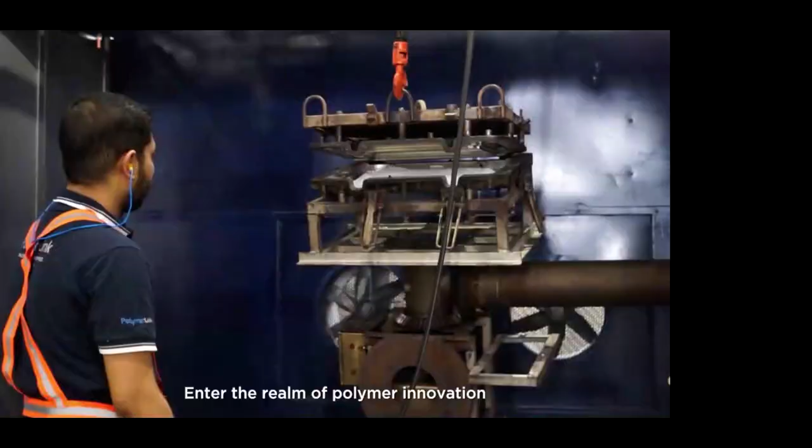We are now living in a future where every design is achievable and every color possible. Enter the realm of polymer innovation, where roto-molding has shaped the world's industries and where Polymer Link takes the lead. A prominent figure in Southeast Asia's roto-molding industry, Polymer Link specializes in polymer compounding and raw material supply.

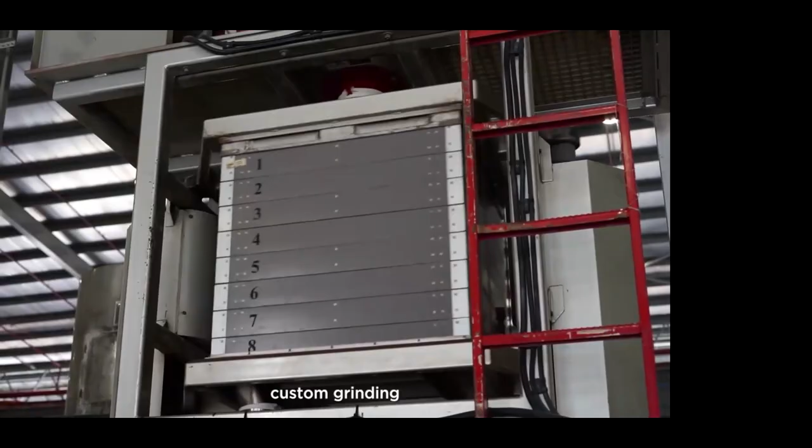Our expertise spans polymer compounding, custom grinding, and the meticulous crafting of color master batches. With dynamic state-of-the-art facilities positioned across Malaysia, India, and the Philippines, Polymer Link is poised to be the gateway to a dynamic ASEAN market. Our strategic presence across the region represents the seed of innovation, cultivating an environment where creativity and progress thrive. These are the spaces where ideas take form and where businesses come to life.

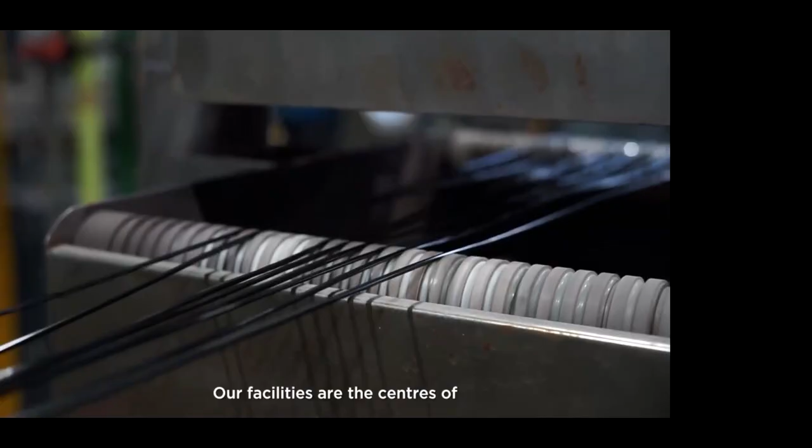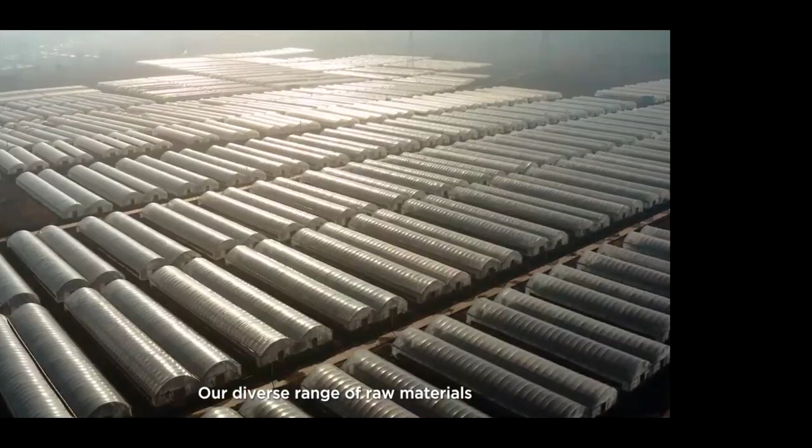Our facilities are the centers of technological advancement and breakthrough, where polymer solutions are developed, continuously reshaping industries and touching lives around the world. Our diverse range of raw materials is carefully designed to cater to the specific needs of various businesses. From specialty grade to engineering grade and culminating in standard grade materials, we've got every aspect covered to meet every demand imaginable in the world of polymer innovation.

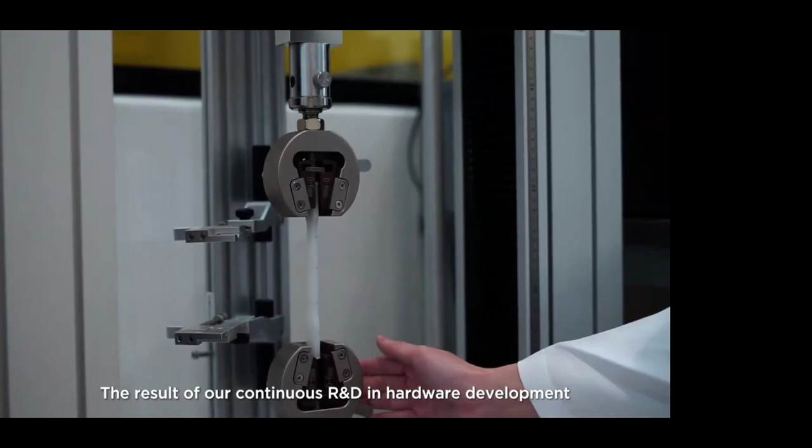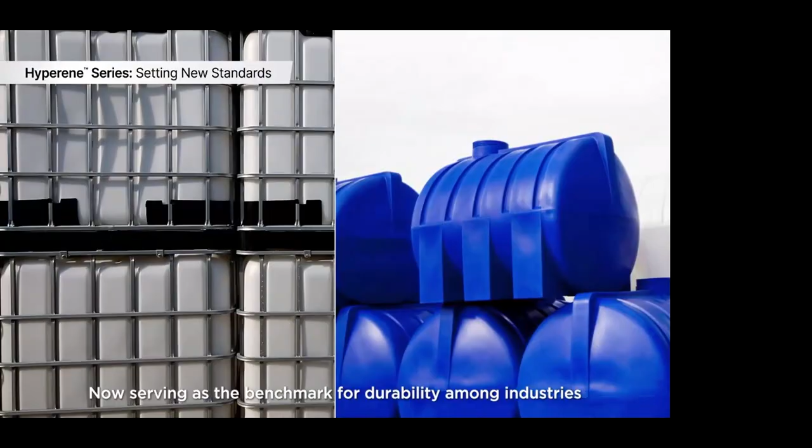The result of our continuous R&D in hardware development and material cultivation is the Hyperene series. More than just a polymer, Hyperene is a specialty-grade roto-molding material that raises the bar for toughness, now serving as the benchmark for durability among industries dealing with highly corrosive materials and intensive wear and tear.

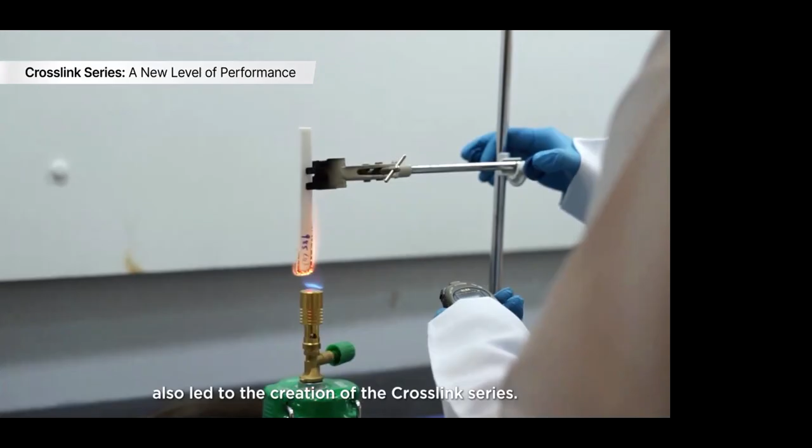Consequently, our advancements in material technology have also led to the creation of the Crosslink series, known for its low odor formation, minimized pockmarking tendency, and wide processing window.

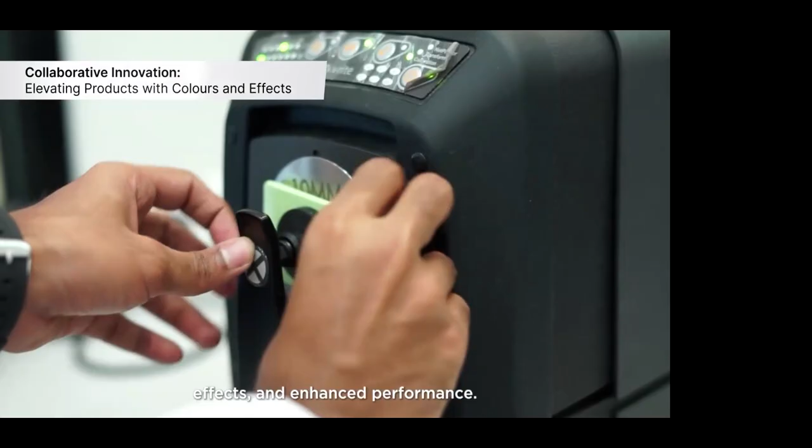At Polymer Link, we are ultimately collaborators working alongside clients and suppliers to create masterpieces of color, effects, and enhanced performance. We are the architects of polymer innovation, committed to excellence in research and development to maintain the highest quality standards. Our dedication to quality is validated by our certifications: ISO 9001, ANAB, JAS-ANZ, and BSI Kitemark product certifications.

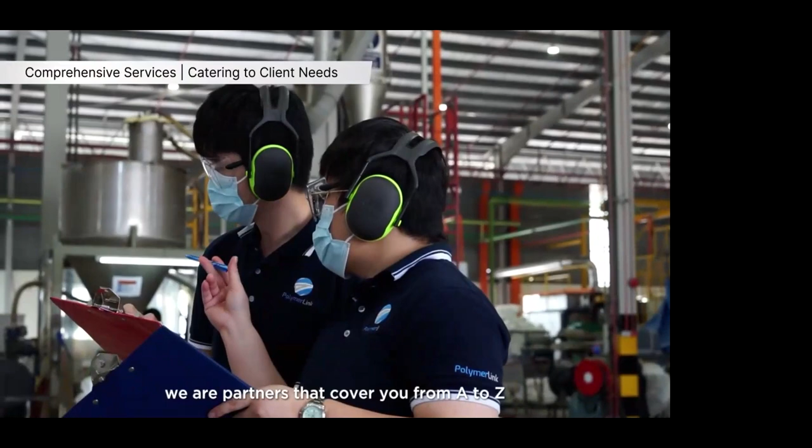Thus, Polymer Link is more than a supplier. We are partners that cover you from A to Z, from technical support and troubleshooting to seamless toll processing, optimizing every step of your journey in the world of polymers.

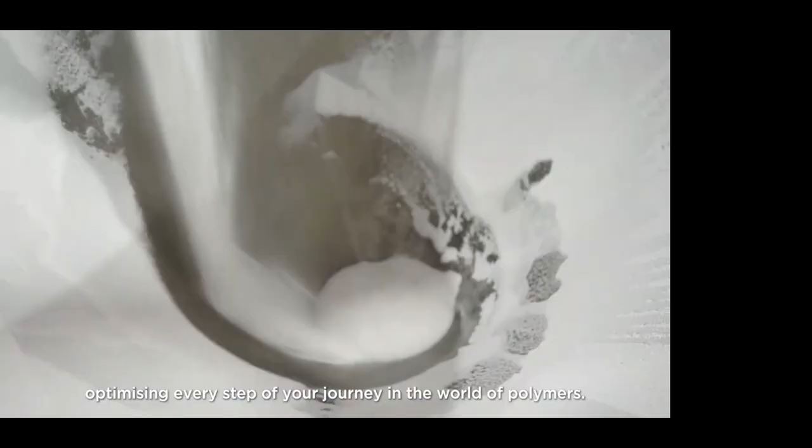All in all, we transform dreams into reality. Designs come alive, colors pop, and possibilities become tangible. We turn potential into reality. Polymer Link, igniting innovation, molding tomorrow.

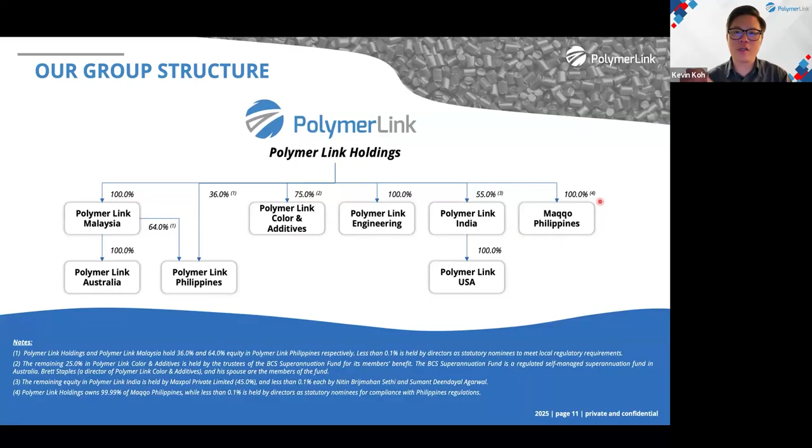The group owns 100% of all subsidiaries except for Polymer Link Colour and Additives, where we have a 25% minority shareholder, and Polymer Link India, where we also have a 45% local minority shareholder. In the Philippines, we also own 99.99% of Maqqo Philippines, with a nominal portion held to meet local regulatory requirements.

Before I move on to our business overview, I would like to frame the plastic landscape quickly so that rotational molding has some context here.

If you imagine all the major processes in the plastic industry, you will have injection molding, which dominates small parts at very high volumes but requires expensive steel tools. Blow molding is for hollow thin wall bottles at very extreme volumes, the likes of your jerry cans, your shampoo bottles at home. So those are all blow molding.

Then you have thermoforming, which is for food containers, a heated sheet shaped into shallow shells. And then we move on to our industry, which is rotational molding.

Rotational molding is basically slow baking of the powder inside a rotating mold. The whole process is stress-free, and the whole part is one piece with very uniform and thick walls.

Polymer Link is involved in manufacturing of plastic powder for both general and specialty applications, with a core focus on this rotational molding industry. Our capability spans formulation, compounding, and grinding. As I mentioned earlier, we also manufacture master batch, which is used in-house as well as externally.

For general applications, they are designed for day-to-day use. For our specialty applications, they are engineered to meet more stringent requirements such as UV resistance, impact strength, as well as environmental stress crack resistance.

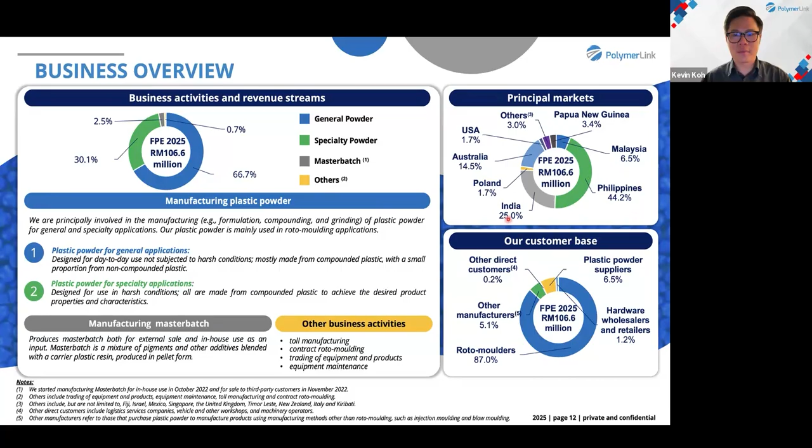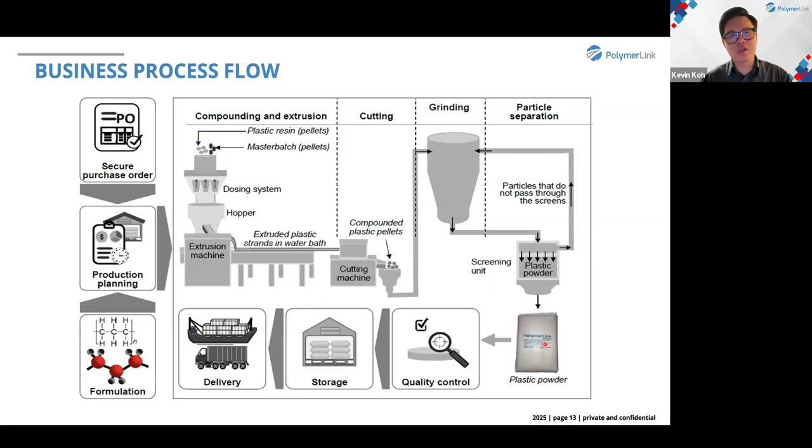Then stage two covers our niche expertise, which is size reduction. So the pellets go into a granulator and are ground into the final form, which is plastic powder. This is the form used in the rotational molding industry, and it's the only form that works well with this process.

Some of these are competition grade kayaks, so they require very high rigidity for their use. And then you have diesel fuel tanks, you have anti-piracy barriers. Anti-piracy barriers are used in the security industry.

They are utilized by shipping liners where it's fitted onto the ship. This prevents pirate attacks. A lot of these shipping liners actually go through straits where it's very prone to pirate attacks, like the Somali Straits and others.

For general applications, our powders support day-to-day product needs and industrial categories. This helps customers achieve cost-effective designs at scale.

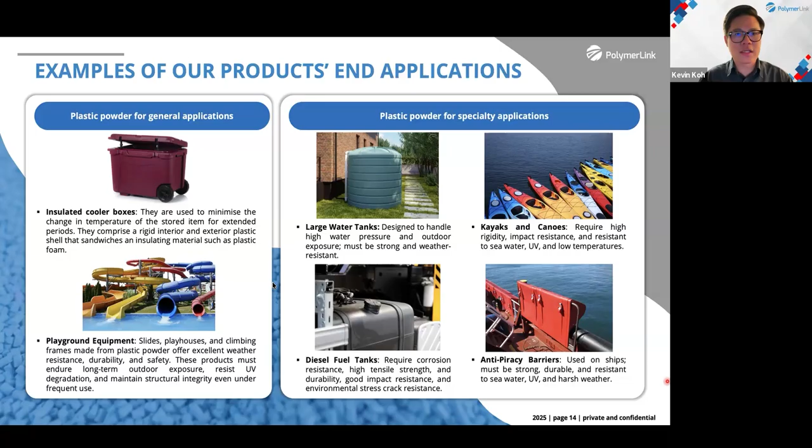Customers typically purchase our powder and then place it into this hollow mold. The hollow mold is then covered and transferred into the oven. Inside the oven, the mold rotates on two axes, so it's a biaxial rotation. As it rotates, the oven heats the mold.

Once it's cooled down, the part is removed as one seamless part. So if you have, let's say, a cover of a printer, it is removed as one seamless part and you can just fix it onto the printer.

So rotomolding offers many key advantages. The first one would be no high pressure required, so therefore more affordable molds. With injection molding, because of the pressure required in the process, the molds are actually very expensive. But for rotational molding, it's the opposite.

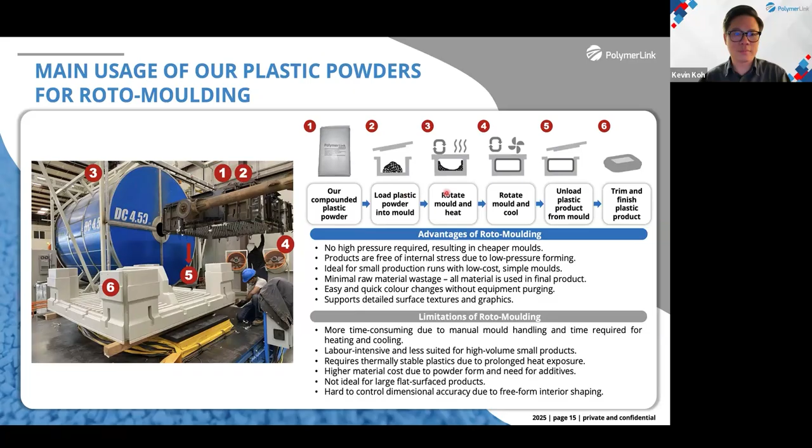So what I'm going to show you here, it's a video of our customer's process.

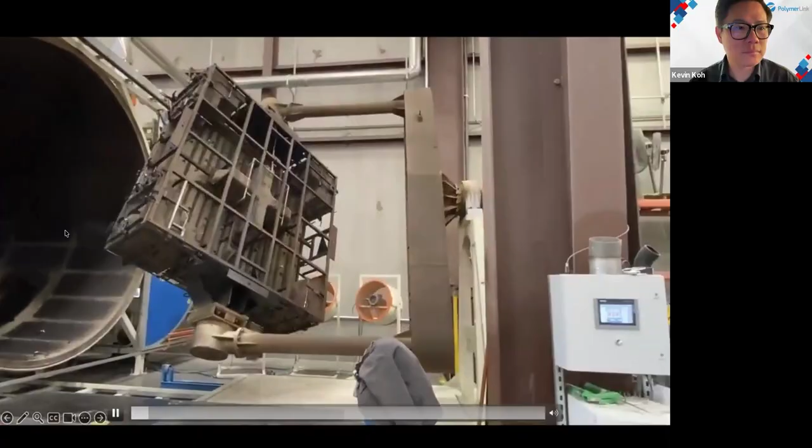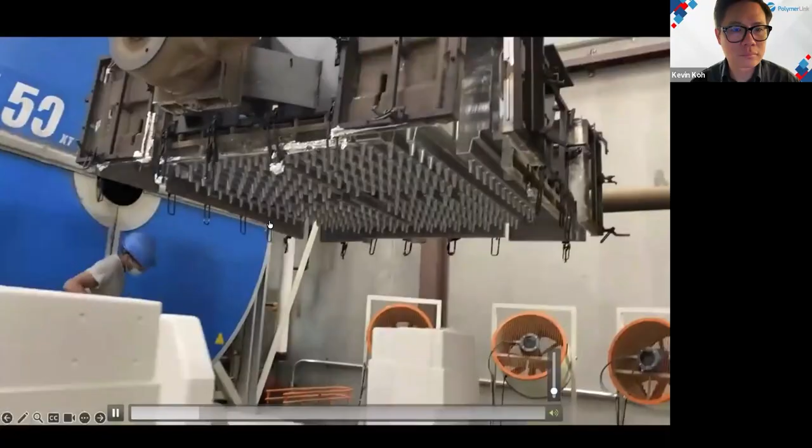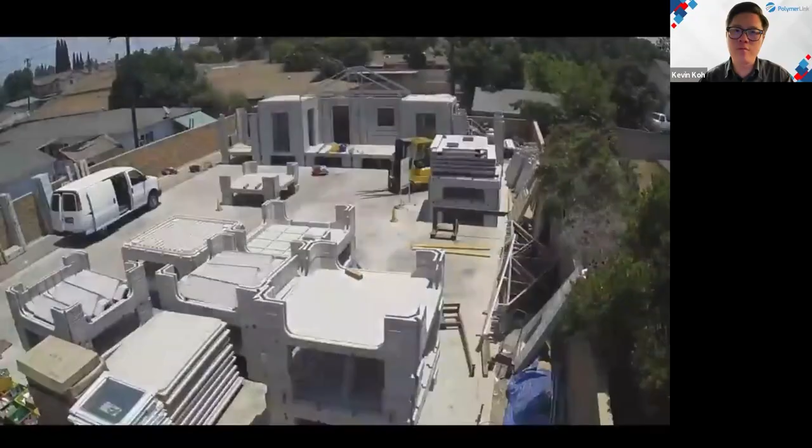So what you see here is a modular housing component. So they are actually placed together like Lego. And in this particular material, we have formulated it with flame retardancy as well as 30% post-consumer recycled material. So these are all your film waste, your single-use plastic waste, and that is compounded into the material that we have formulated for this particular customer.

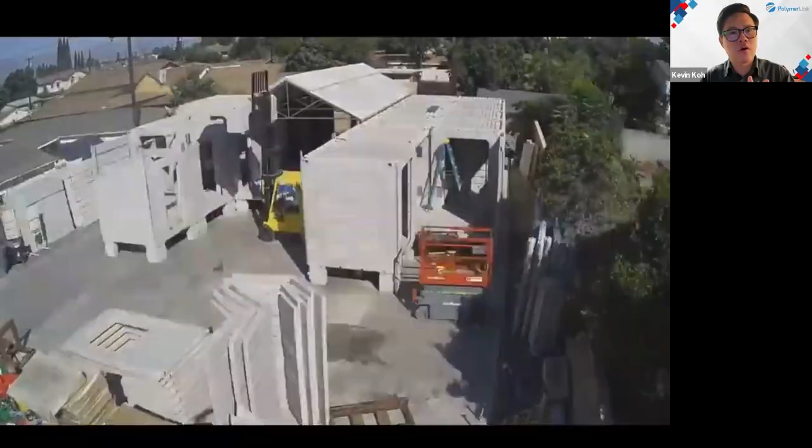So of course, for housing structure, there's a degree of structural integrity that is required. So with the recycled material, it is usually a challenge, but we have done a lot of R&D work to ensure that it works for this particular use here. So it's a full-scale housing community that is all produced by this plastic component.

Okay, moving on to our operations. So we operate factories in Malaysia, the Philippines, as well as India. All our operations have similar machineries and it's a very standardized process. So that means we have backup capacity if there's demand surges in any one of our locations or a plant needs downtime. We can always reallocate our production and also maintain our delivery schedules.

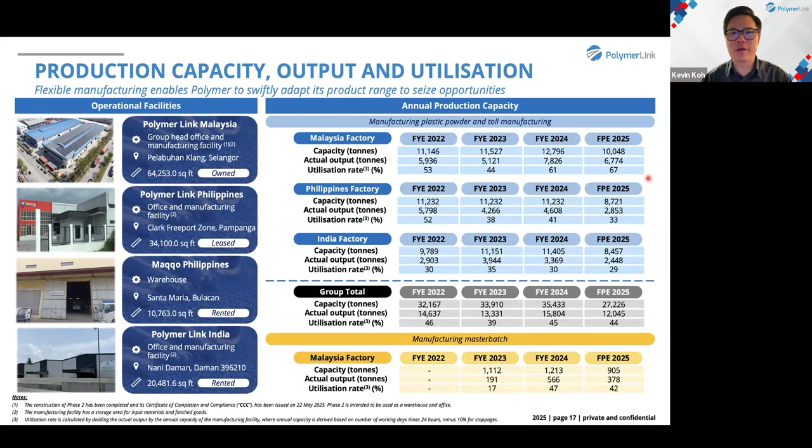So this is a very important thing that we manage because a lot of our customers are located globally, and their purchases are also done on a monthly basis. So utilization is a very key thing that we manage very carefully. Okay, now on to the financial highlights. I'll pass this off to Jun, our Group Financial Controller.

Jun, please. Okay. Thank you, Kevin, and good evening, everyone. I'm Jun, the Group Financial Controller for Polymer Link, and now I'm pleased to share the key highlights of our financial performance over the past few financial years. Right. Sorry, I have something popping up on my screen.

All right. Sorry. Our group total revenue stood at 151 million, 133 million, 145 million for financial year 22, 23, and 24 respectively, while in FPE 9 months 2025, our revenue stood at 107 million. The group revenue is primarily generated from general powder and specialty powder, which represent about 67% and 30% of our total revenue respectively, while the rest is contributed by master batch and other segments.

And as we can see from the second graph, the Philippines remains the group's largest revenue contributor, followed by India as the second largest. And interesting to note that Australia has emerged as a fast-growing market, accounting for 13.6% of total revenue in FY 2024 and 14.5% of total revenue in FPE 2025.

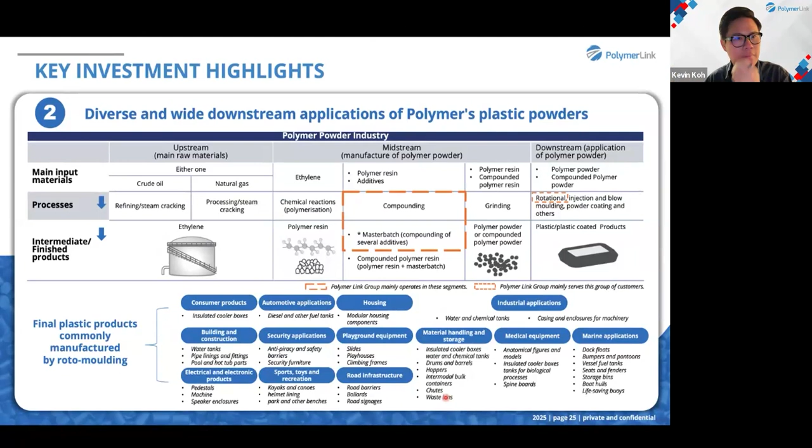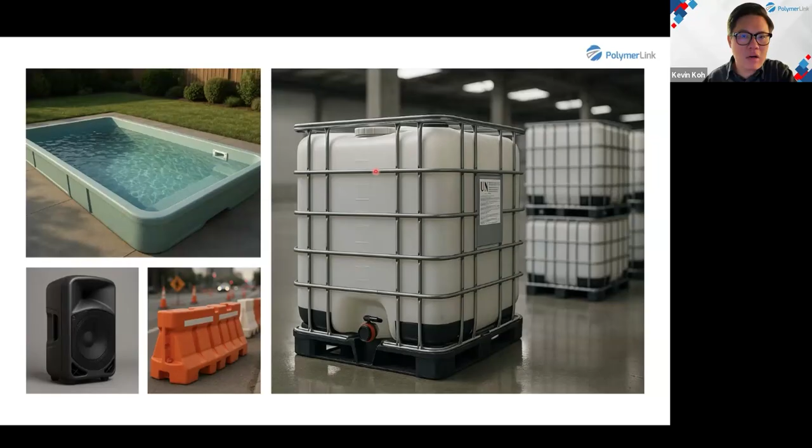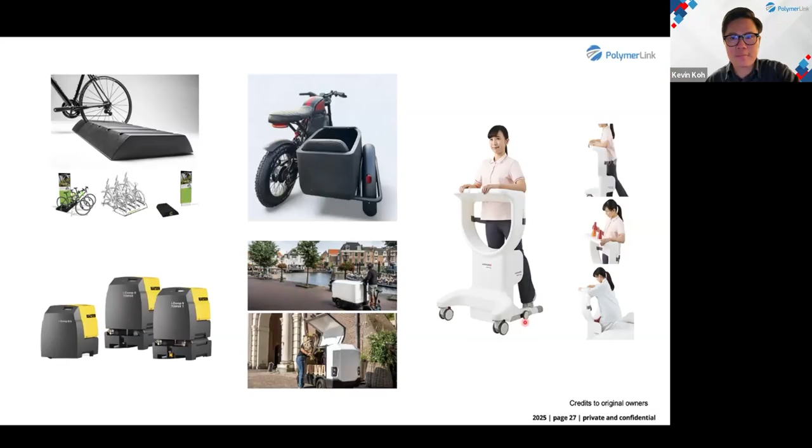So on the R&D side, our team is led by myself, and I'm also supported by PhD-level talent. And we continue to enhance our portfolio of more than 1,000 formulations. The point here is very simple. Our R&D is not outsourced. It is integrated into our production operations. So this ensures that we have faster turnaround with all our customers. If they have any inquiries, we can change it because it's part of our production operations. So this actually gives us better long-term customer retention.

So we have also built our business on very consistent execution and a very stable leadership team. Polymer Link has more than 11 years of operational history, expanding into 5 countries, as well as growing a very global customer base. This consistency is driven by our leadership. Eddie himself has more than 30 years of experience in plastic manufacturing. Edward oversees our supply chain with 19 years of experience.

Our financial controller, Mr. Lau Jun Hong, has a decade in corporate finance. And our Indian operations are led by Mr. Holy, who also has more than 30 years of technical and production experience. So in a nutshell, we understand this business very deeply, and we have scaled it very sustainably.

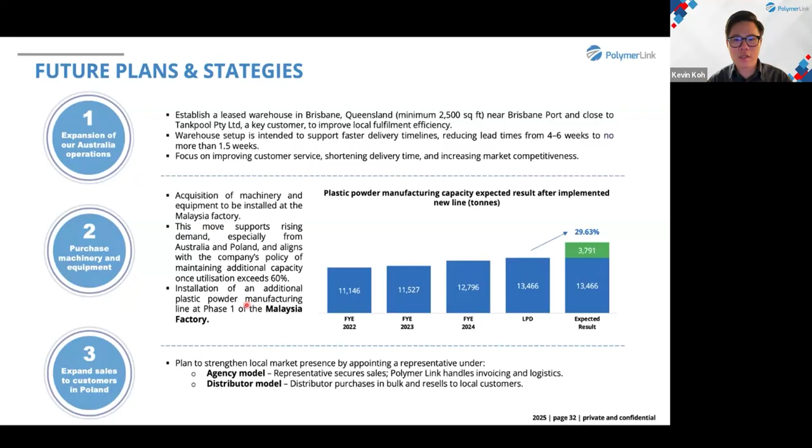In Europe, we also intend to appoint a representative in Poland, under either an agency model or a distributor model. The goal here is to expand sales coverage and logistic efficiency for the broader European market, building on our existing customer relationships. Because of these two pillars, we also plan to acquire additional machinery and equipment for our Malaysian factory. This is to meet the rising demand, notably from the Australian and European regions. This again aligns with our internal policy of maintaining headroom once utilization exceeds around 60%. So following these investments, our plastic powder manufacturing